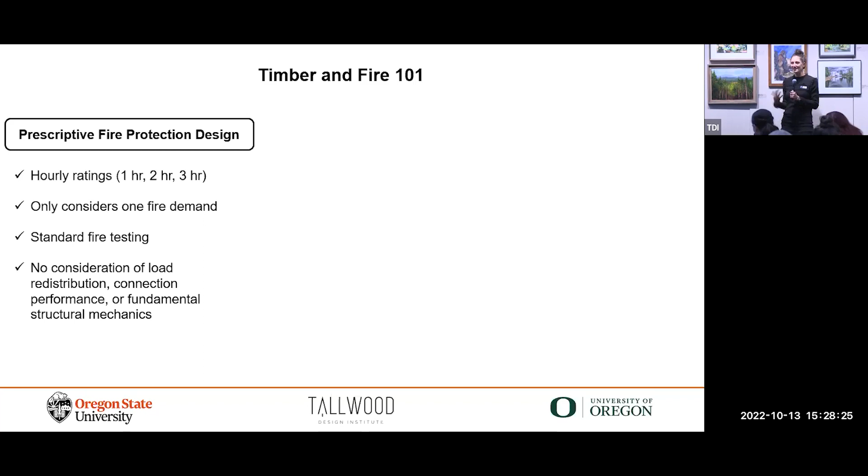This does not consider load redistribution. It doesn't consider any of the amazing topics of structural mechanics that we teach our students. It doesn't consider heat transfer through the cross-section. It is only just these very prescriptive requirements. On the flip side, we have performance-based fire design or structural fire engineering, and that's where we do actually use our knowledge of structural mechanics and structural engineering to design these structures. So we're looking at building-specific fire demands. What is the actual fire in the space? We're actually considering fire dynamics. We're looking at system-level evaluation, and we're considering load path.

This is where the research is. So when we're talking about fire tests or we're talking about numerical models, we are not trying to get an hourly rating out of it. We're just trying to understand the fundamental mechanics of what is happening in this structure during a fire so that we can better design our structures to maintain load carrying capacity throughout the fire.

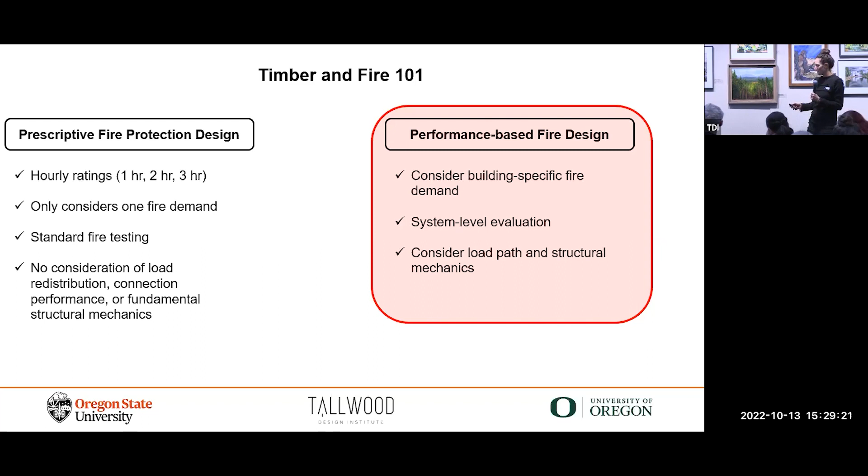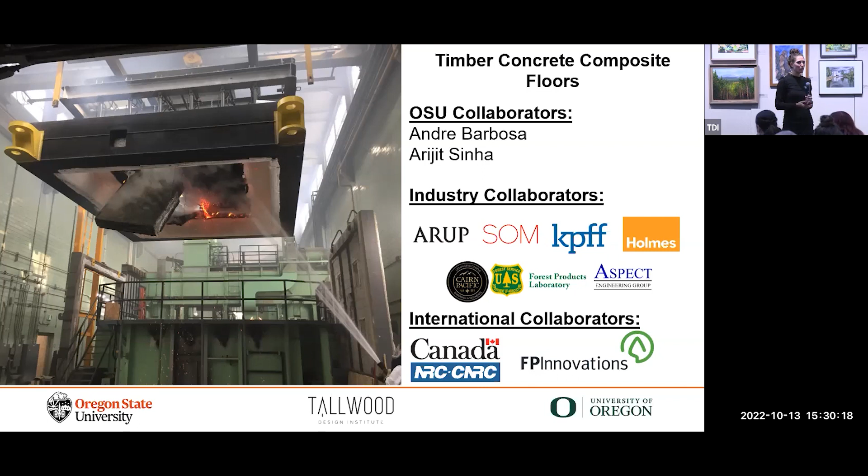All right, so to start off on timber-concrete composite floors, this project has been going on for quite a while. We finished testing, we've done numerical modeling. There's a really great poster over here by a student, Julie Liu, on all the finite element modeling that has been done for this project. This is in collaboration with Andre Barbosa and Arijit Sinha, as well as a lot of industry collaborators. But one of the things that I want to highlight as part of this project is that we were able to establish collaboration with our friends to the north in Canada. So all of our testing occurred at the NRC in Canada. We developed a really strong collaboration with them to share data, to share resources back and forth and information. We also developed a really great relationship with FPInnovations to collaboratively tackle testing and modeling of these floors and share resources across North America.

And so we tested 2 CLT-concrete composite floors, 1 NLT-concrete composite floor, and 1 MPP-concrete composite floor using different shear connectors. We did experimental testing in winter of 2019 and then last year in the fall. We tested 2 different generations of CLT, one that did not adhere to PRG 320-2018, and then one that did have the adhesives that adhere to it. So we could actually compare the results across the two different adhesive types.

We were also able to take all that experimental data and compare it against empirical design methods. So, you know, what happens when we're using the elastoplastic method and gamma method for fire design? Can we actually use that? Is it applicable to all three of these types of floors? Is it applicable to floors with dowel type of connectors versus truss plate connectors?

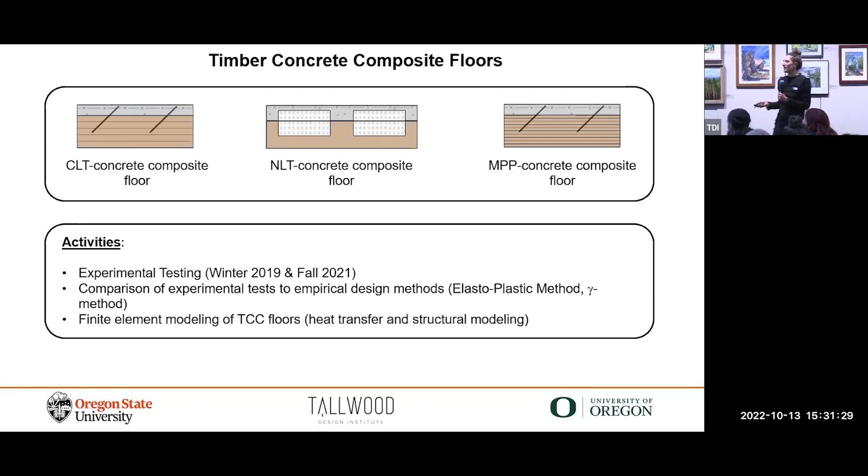And then what Julie has been doing is all these finite element modelings of these floors, both heat transfer and structural modeling. So we were able to actually see through all of this that when we do finite element modeling in fire, first we model it without the fire. So we model it at ambient temperature. And we're able to see that we're looking at different behavior at ambient temperature than at elevated temperature. We're looking at different failure mechanisms.

We might have rolling shear during fire. We might have tensile failure of the timber during a fire. We might have connector failure, or sorry, at ambient temperature. We don't have any of that during a fire. The connectors remain elastic. The timber remains fairly elastic.

And so we're able to kind of compare across between ambient temperature and fire and see, well, if we're designing these at ambient temperature, then what are the detriments we're opening ourselves up to in a fire? And how do we actually design for that robustness during a fire itself?

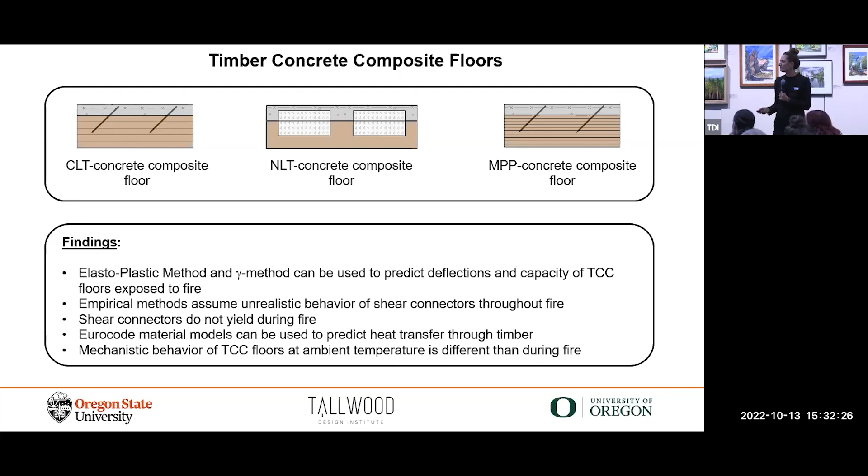Okay, so I'm going to talk about connections a little bit. Lek already talked about this really great project that he's leading, but I'm going to start off with glulam beam to column connections. We tested 5 different connections under deformation compatibility in the Richardson lab here on campus. These were 3 custom connections that we developed here at Oregon State University, and then 2 connections that were tested through sponsorship through MTC. And we were able to do 1 monotonic, 2 cyclic loading tests.

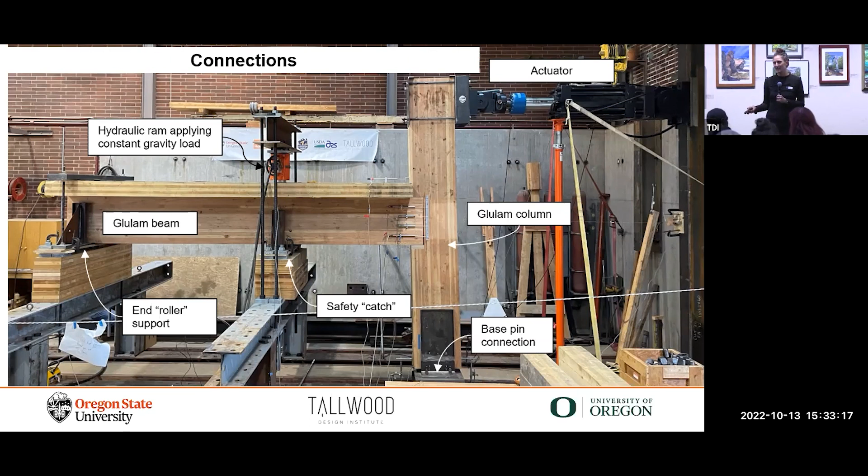I'm not going to present the results of this because this is the fire session, but I'm mentioning this because we're taking these connections and we're testing them in fire. So the point is so that there's deformation compatibility data and there's fire testing data for the same connections. Okay, so this is in collaboration with Arijit Sinha, as well as industry collaborators with KPFF and Holmes. And again, leaning on those international collaborations.

So we developed them, you know, 5 years ago, 4 years ago, testing the TCC floors. We're able to continue these international collaborations. FP Innovations is going to use the data from these tests to perform finite element models and then allow us to run parametric studies on connections, right? So the whole point is that we're not continuing to test every single possible configuration of glulam beam to column connections in fire. That's impossible. We want to understand the fundamental mechanistic behavior so that all of you can actually design these connections for maintaining load carrying capacity throughout the fire.

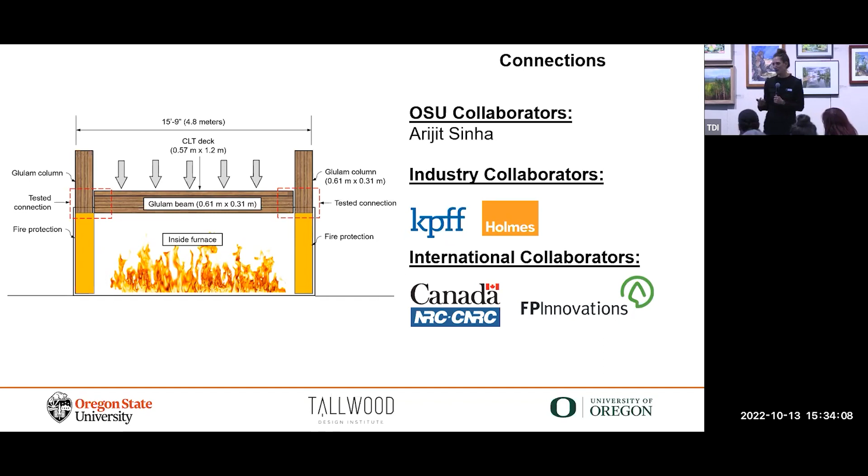Some of the connections that we're testing: on the left is a knife plate connection. So the knife plate is slotted into the glulam beam, and then it is screwed into the column. We tested this under deformation compatibility, where we have a notch that exceeds the allowable notch in NDS. So we're looking at what are those potential stress concentrations we could see at that notch. And now we're going to test it in fire.

On the right is a beam to column connection where the beam is just slotted right into the column. There's really little mechanical connection between the two. We tested 2 versions of this under deformation compatibility, one with compressible insulation behind the beam and then one without. So what happens if you do have a gap and you can't get everything really tight? Can you put compressible insulation in there? What's the implications of that on the seismic performance? We're gonna look at that in fire as well.

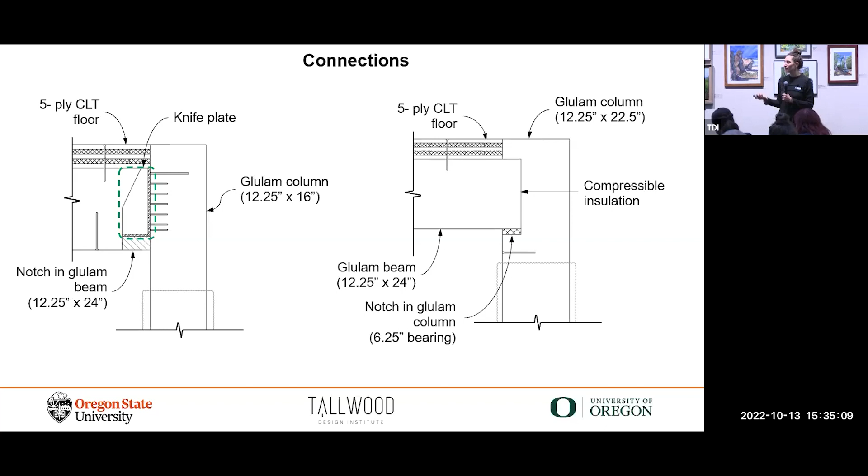And the last one is 2 glulam beams sandwiching one column, with a steel bearing plate running between the 2. This connection has a lot of implications in heat transfer. So if we're threading a steel plate through the column, through both beams, we could potentially see some char propagation, some heat transfer propagation through that steel plate and into the timber itself. So this will allow us to really explore that.

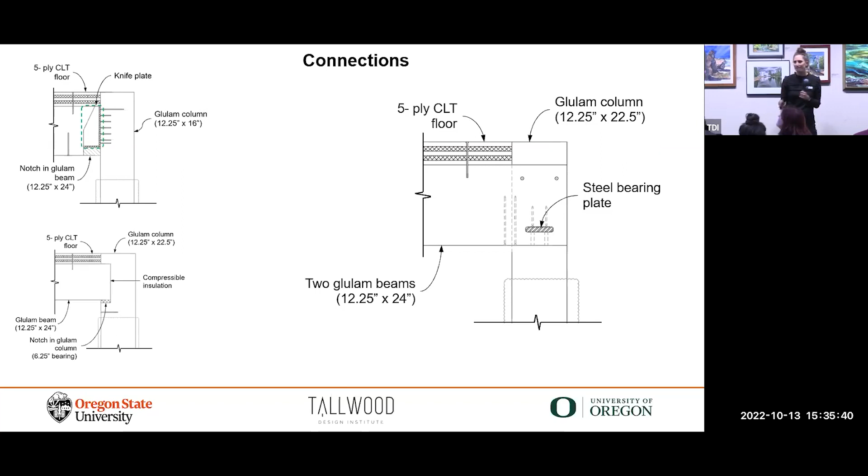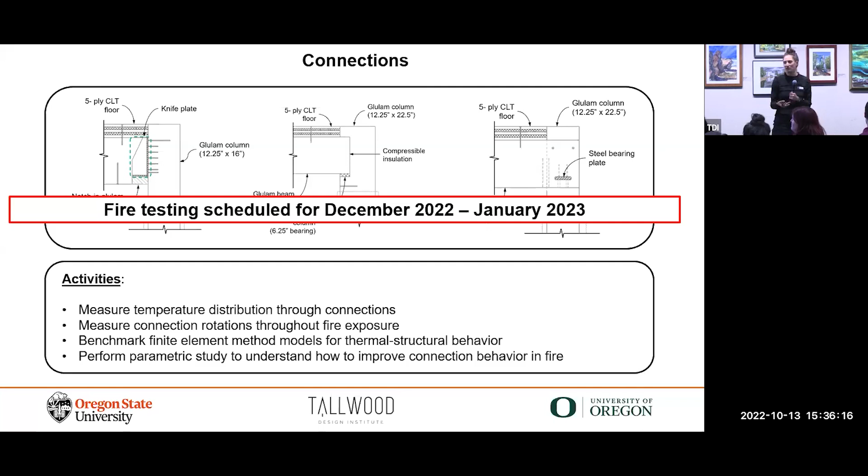All right, so this hasn't happened yet. It's scheduled for the future. Stay tuned. Next year, I'll show you what happens. So we really want to look at the temperature distributions through the cross section. We want to gather enough data so we can benchmark these finite element models. So then we can also look at other behaviors. What happens if we reinforce notches with more screws? Does that create issues with heat transfer and accelerated charring, or does that actually help the strength of the connection during the fire? So stay tuned for this one.

Lech already talked about this one, but I did want to put all of the fire research together so you get to see really the full breadth of what is happening here at Oregon State University. In this testing, we were testing balloon frame and platform frame construction connections during a fire. And what TDI was able to do is provide supplemental funding to this grant to allow us to look at smoldering. So we have been testing a lot during the heating phase of the fire, but eventually the fire will go out, or the fuel will be consumed in the compartment.

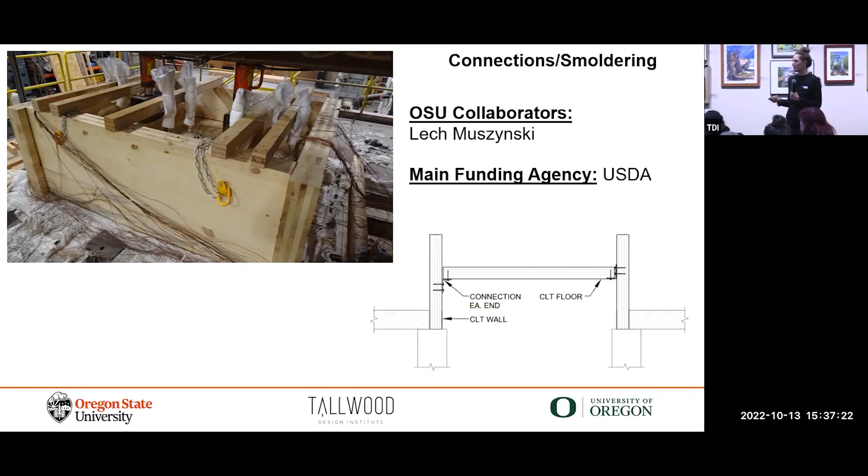And then what happens? What is the subsequent heat transfer through the timber itself? Do we continue to see charring of the timber? How do we design these structures so that firefighters, when they enter the building, feel comfortable and can understand where smoldering may be occurring and where smoldering may not be occurring? So this is really critical to understand. So we were able to keep these specimens on the furnace for an extra hour.

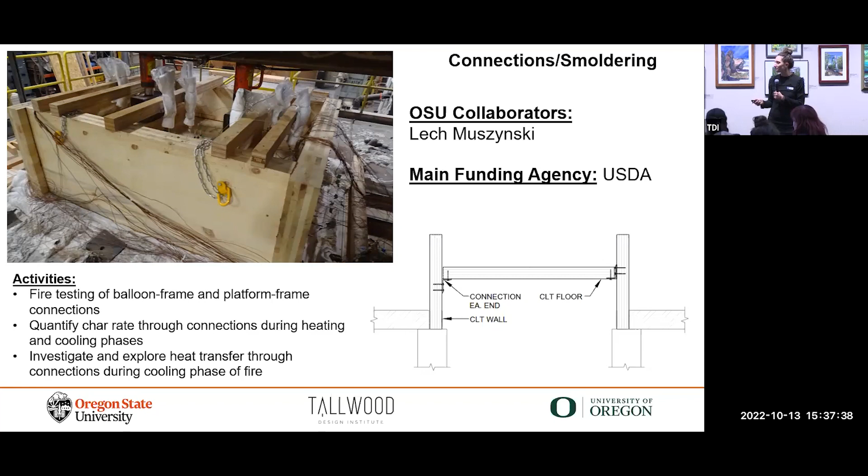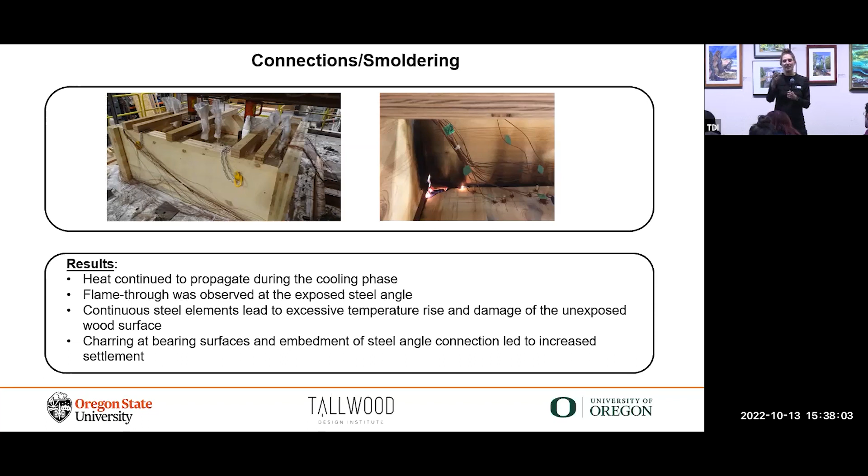Okay, so timber concrete composite floors, you saw a little snippet of what's happening in connections. So kind of looking at things elementally in a building. And now what I'm going to focus on is how do we bring it all together? So how do we actually model the whole compartment, the whole building together? And so in system level behavior, we've been looking at integrating BIM and Fire Dynamics Simulator.

There's a really awesome poster by Chi Sun over in the corner here. You should check it out. It's really amazing. And this is in collaboration with Yelda Turkan. She's a construction engineering management professor in civil engineering. And she's already developed methods to integrate BIM and time.

So we have a really big problem because we have this stipulation in the International Fire Code that doesn't allow us to have more than 4 floors unprotected as we go up a building. And so how can we actually design for the construction phase? How can we do fire design for the construction phase of the project? And what are the benefits or detriments of actually violating that International Fire Code stipulation? So this is the goal of this project.

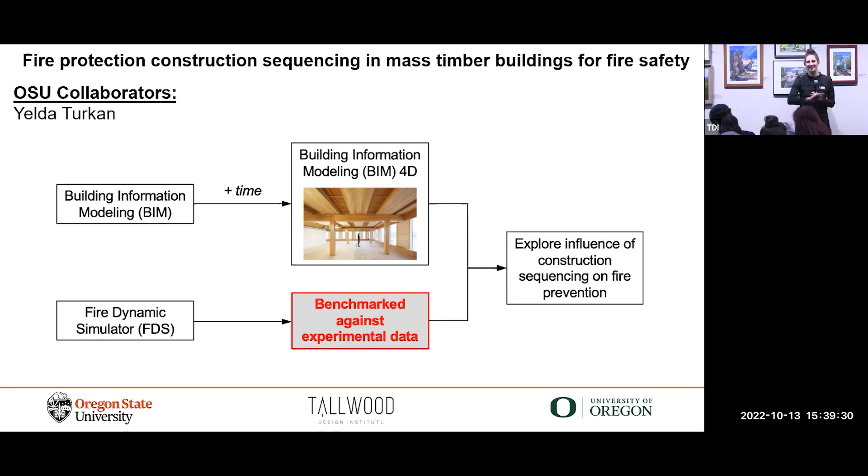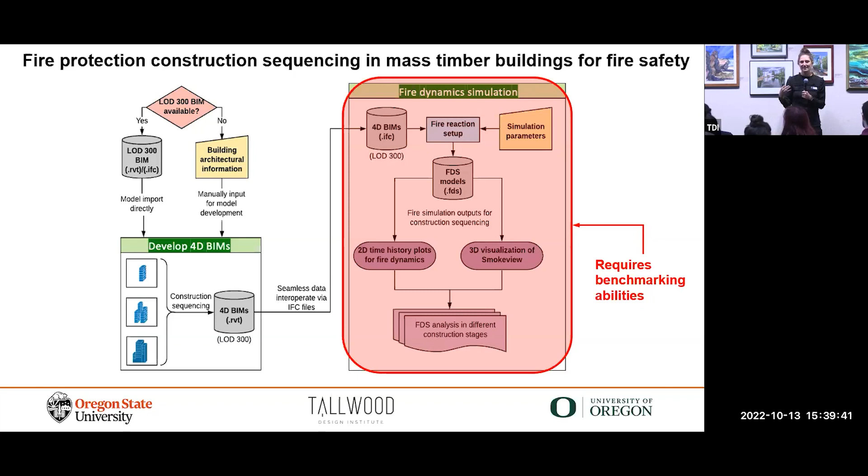But in order to do that, we need to simulate the fire itself. And that's where Chi comes in, it's just incredible doing this. So what we've been doing is benchmarking all the fire dynamics side of this integration against existing experimental tests. And we're able to actually simulate these compartments virtually through Fire Dynamics Simulator. We can simulate the energy being released over time in these compartments. We can simulate the temperatures in the compartments. We can simulate the airflow.

And that allows us then to integrate it with BIM, which is what we'll be doing over the next year, and actually look at the fire at different stages of construction. So when do we absolutely have to put in that fire protection in order to protect our property and an asset of the building? And what we found is that when we have this larger CLT exposure, we actually have a shorter time to flashover. It means that the fire engulfs everything in the room a lot faster when we have more exposed CLT.

But it's not just about more exposed CLT. It's where is that more exposed CLT? And that's what we're able to do with FDS: we're able to actually look at, is the ceiling more critical? Are the walls more critical? Are the columns more critical? And how can we strategically apply our fire protection to minimize that fire impact on our asset, on our building?

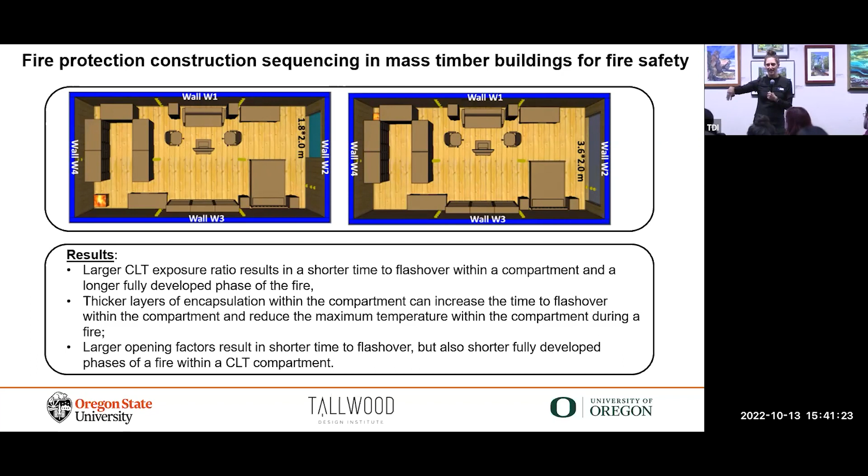And then we are also able to look at the impact of opening factors. So those are windows, right? So if we have more ventilation, then we can reach flashover really, really quickly, but we actually have a shorter fire duration. So we can look at all these different parameters and benchmark them against experimental tests so that we can integrate that into the design process.

All right, so the other full building, bigger scope is looking at life cycle assessment. So what we've been looking at is environmental impacts of these fires. And this is in collaboration with Arijit Sinha in Wood Science. And we wanted to understand, some of you probably got our survey.

We wanted to understand what are the biggest priorities if we wanted to integrate LCA and fire? What are we missing? What research are we missing? What data do we not have? And what is the biggest priority? What's the most important thing for us to fund? And then we also asked people what is the likelihood that this will be completed by 2030, to see how optimistic they are about the research funding.

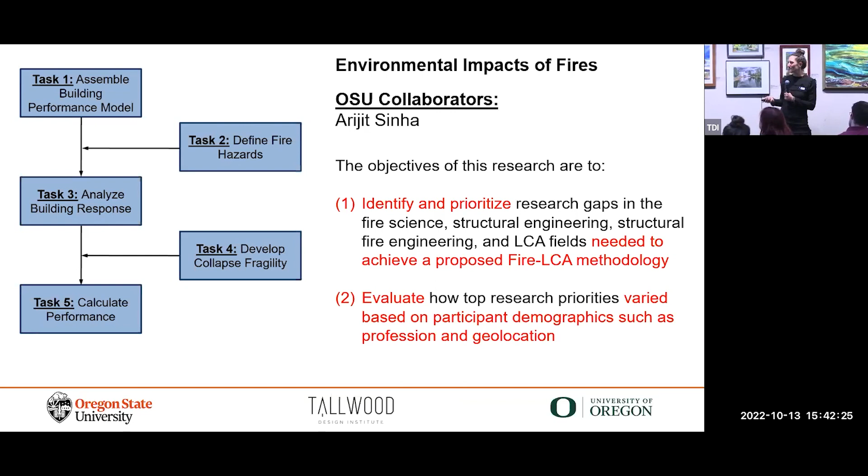So we were able to pull together some top research priorities in the field of LCA and fire. And what we found is really statistical data describing the number and severity of fires, data on composition and physiochemical properties of building contents and assemblies. So then we can look at emissions data from the fire itself, and then looking at damage modes of structural components.

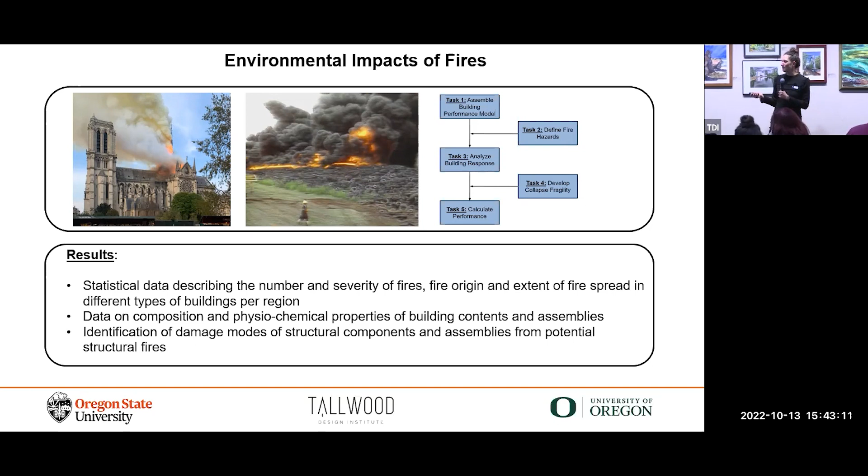And so this last part kind of ties into these first two research projects that I was talking about, the TCC floors and the connections, right? We're looking at damage modes, being able to understand how these components are actually damaged in a fire so then we can design for them not to be damaged like that in a fire. And the second point here is where we're going in our next project.

So we've kind of identified in these three areas that we have really complex fire behavior in our compartments. We're seeing that the CLT itself is contributing to the fire in our compartment, which is then contributing back to our damage mode. So we have this cycle that we're developing. We're seeing that the structural behavior of our timber components is different in a fire than it is at ambient temperature. So we're not seeing the same damage modes in both.

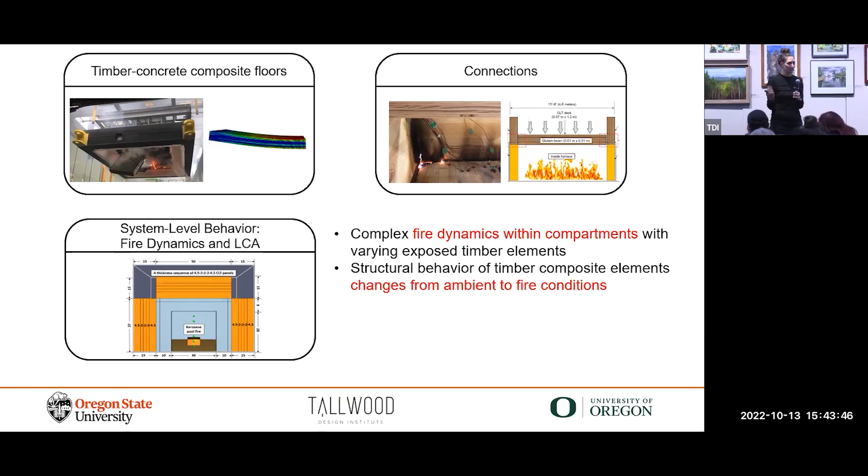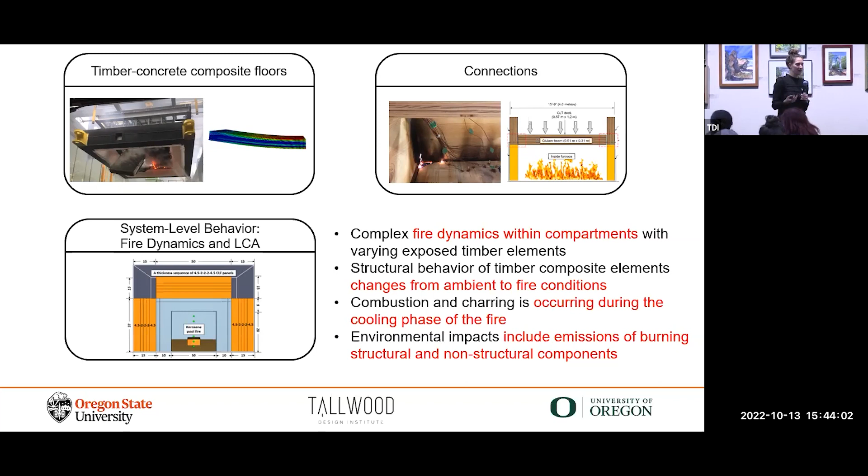And we're seeing that combustion and charring is occurring during the cooling phase of the fire, as well as the heating phase. And then what we desperately need is to understand these emissions from the fire itself. And so this is where we're going in the future. So this project is being kicked off.

It's in collaboration with USDA, with the EPA, with the Forest Service, and with ARUP to really look at LCA and fire, to look at smoldering, to look at emissions, to be testing components from small scale to large scale and develop data through scaling and understand, can you develop data through scaling? Can we test small components and have that be representative of the larger structure?

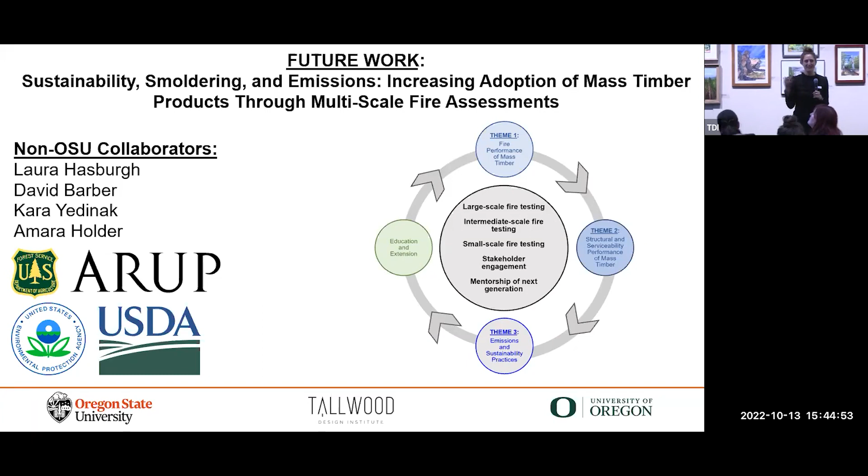Understanding what the emissions are from our actual building components with and without fire protection. What are the emissions that are coming off of our gypsum wallboard versus some more sustainable fire protection materials? So we have all these big questions and we're going to start answering them hopefully soon. Okay, so that's the research.

But what I think is the most impactful thing that we have done through all of this research are these people here. So we have trained and funded all of their educations and graduate educations through this research project. And they are now going and working for all of you. And so I do want to highlight all of these individuals and the opportunities that TDI has provided for them through this funding.

But also, we can educate our students to go work as architects and engineers, but we also have to make sure people can actually build the building, right? So actually, at one of these events a number of years ago, I connected with the Northwest Carpenters Union, and they really wanted to train their apprentices in mass timber construction. And so we did just that.

All of our glulam beam to column connection tests that we performed in Richardson Hall were built as a part of their framing class for their apprentices. And so they were able to actually learn how to build these structures with this material in a controlled laboratory environment, but also ask structural engineering students and professors all the questions they have about mass timber, about things that didn't even relate to these projects, and then come back and see them tested and understand the bigger, broader impact of what we're trying to do and understand through this testing.

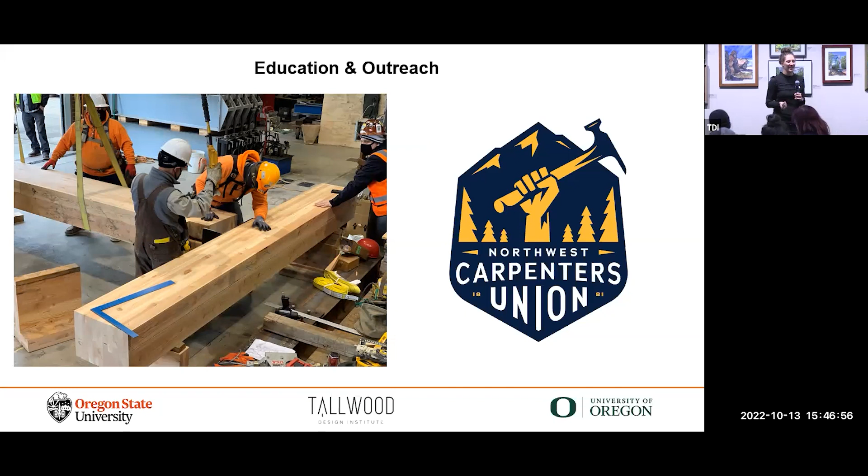And then conversely, it was really awesome to watch the student have to answer all of their questions based on her drawings and her shop drawings that she made for them, which is a great learning exercise for a young structural engineer to go through. So I really thank the Carpenters Union for all they did. They built all our specimens for free, and it was just this incredible collaboration together.

All right, so the second to last thing I'll mention in education outreach is that Oregon is a lumber state. And actually Oregon State University's School of Civil and Construction Engineering has 10% transfer students from community colleges. A lot of our community colleges are located in lumber towns. And so this is a mass timber webinar series, and TDI has supported this graciously. And it really highlighted the interdisciplinary nature of mass timber.

We marketed it out to all the community colleges in Oregon, giving them a chance to see the opportunities in this industry for them through architecture, through construction, through structural engineering, through research, and what is out there for them as they go through their program and hopefully transfer over here and continue their work.

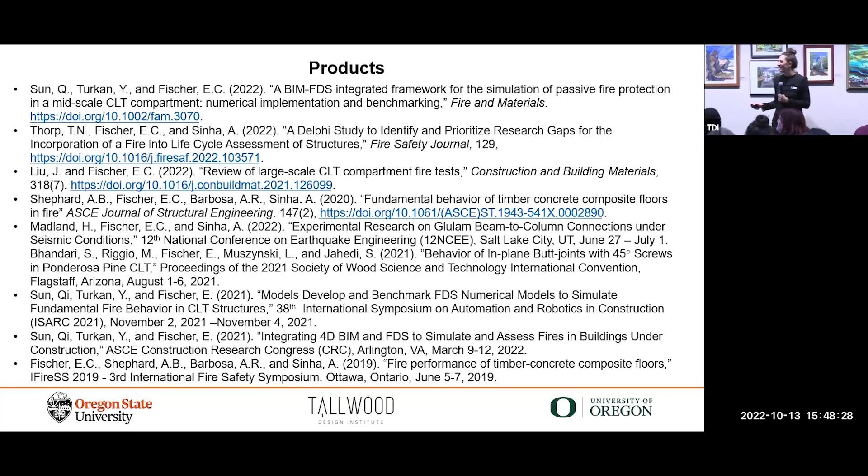These are all the products that have been developed by the research that I highlighted today in terms of papers. This doesn't include all the theses and dissertations of the students. And then the last thing is looking into the future. You've heard a lot about this EDA grant. Part of this funding is to build a fire testing laboratory here at Oregon State University. And it's really exciting. This is an incredible opportunity.

There are no fire testing facilities at universities on the West Coast of the United States. So we would be it. And we'd get to work collaboratively with all of you, continuing to do that and to further this industry.